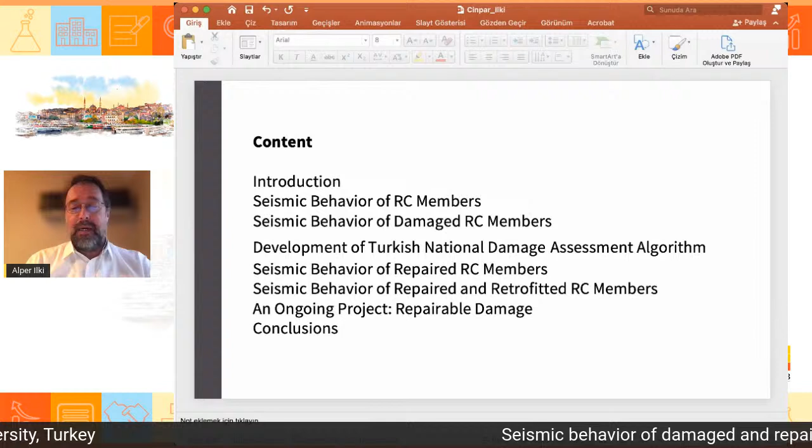Then we are going to talk a bit about the seismic behavior of repaired and retrofitted reinforced concrete members. And then I'm going to summarize an ongoing research project which targets to establish a new seismic design performance level, called repairable damage, which came into our terminology particularly after the earthquakes experienced following the Christchurch earthquakes in New Zealand. And then I will finish with conclusions.

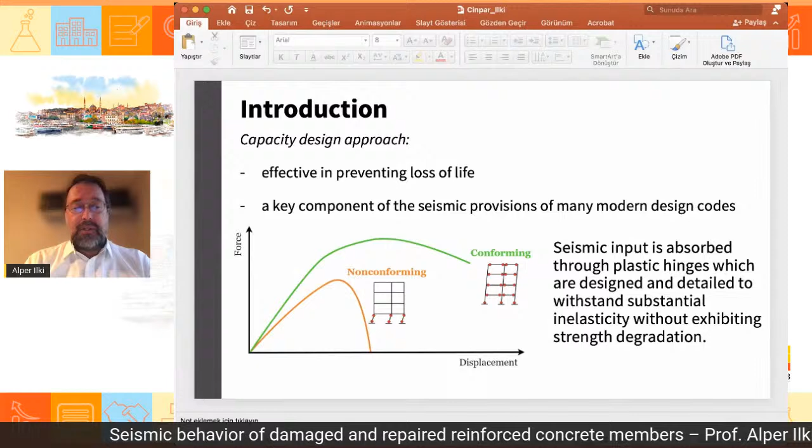So, as all of you know very well, capacity design approach is now being used all around the world in seismic design, which is, of course, very effective in preventing loss of life. That's very good. Because previous structures were not built considering the capacity design principles, such as strong column, weak beam, and the strength hierarchy in terms of flexure and shear, and so on, we had many casualties due to unpreferred failure mechanisms of the structures. But hopefully, after these capacity design principles have taken their place in the seismic design codes, hopefully these kinds of life losses will be less.

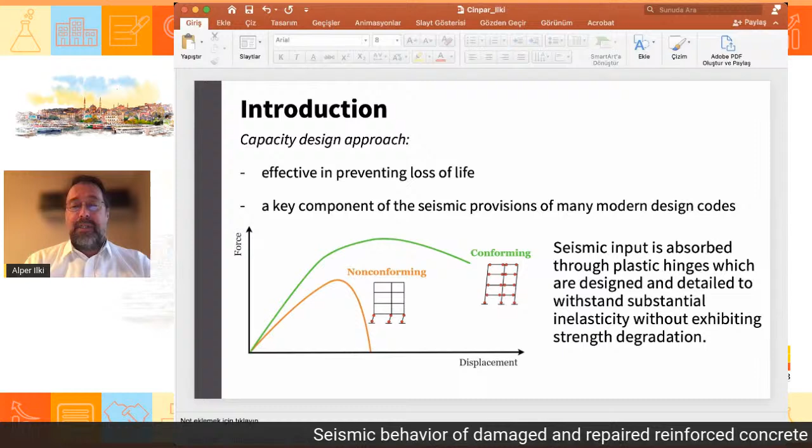So it's a key component now in all the modern seismic design codes, which basically adjusts the locations and types of inelastic deformations so that we can avoid total collapse of the structure, although the structure dissipates a lot of energy and experiences a lot of damage, while still standing against seismic actions without a substantial loss in strength.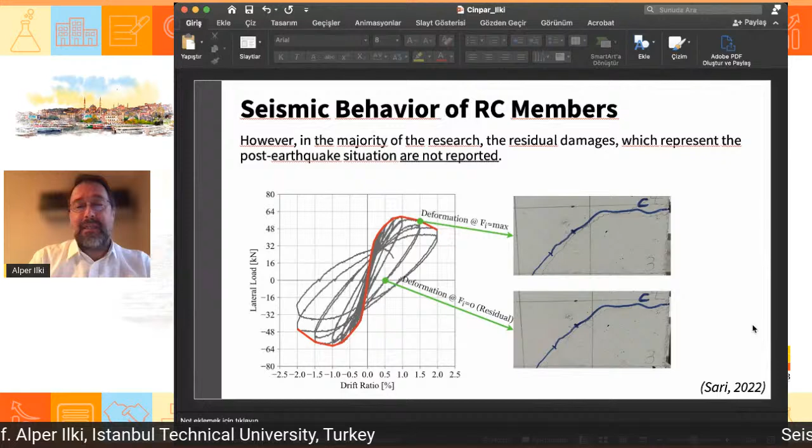We have to pay attention that although code-compliant reinforced concrete members may show gradual damage development, however, non-conforming members can fail very rapidly.

One example, I'll show a video that's very representative of many structures available in Turkey, particularly in Izmir in 2020, where many structures collapsed. Most of those buildings had columns similar to this one. Let me show you the video.

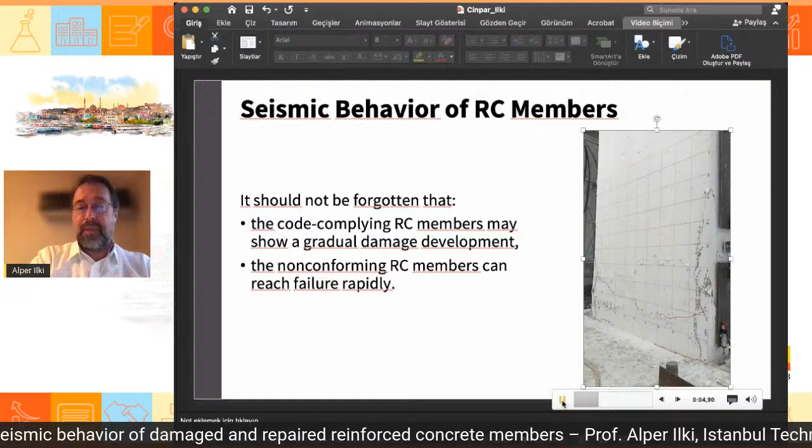I said the column will fail at a drift of 0.5%, much less than what you'd expect according to design rules. So the column is being pushed or pulled. We have a vertical load on the column, and that's how it fails - total destruction because of high axial load on it, very, very rapidly.

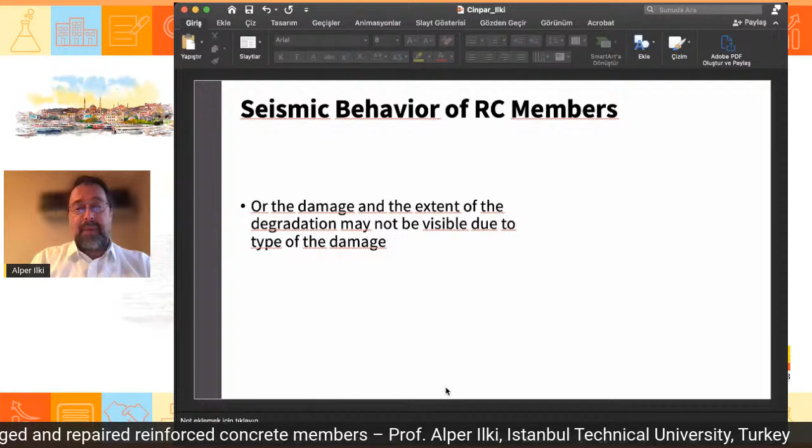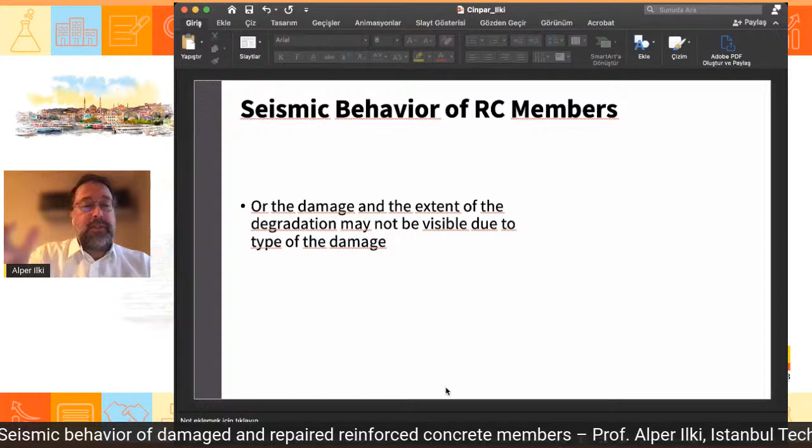Another problem is that the extent of degradation in strength may not be visible after the earthquake, due to damages we are not used to seeing. Code-compliant structures get damaged as we expect theoretically, but because of details like plain bars and insufficient anchorages, there are many different failure mechanisms.

I can show you a video on a project we conducted several years back on site, showing the building while it's being tested. I don't know if it works or not - possibly works, yeah, it's working.

The test went up to 4% drift, as you see on the graph on the right. At 4% drift, the strength reduction was about 40%. That's good for the structure because it's beyond our expectations - we wouldn't expect it to reach 4% drift and still stand, but it did. More interestingly, the damage was very slight; we didn't see much damage on the structure.

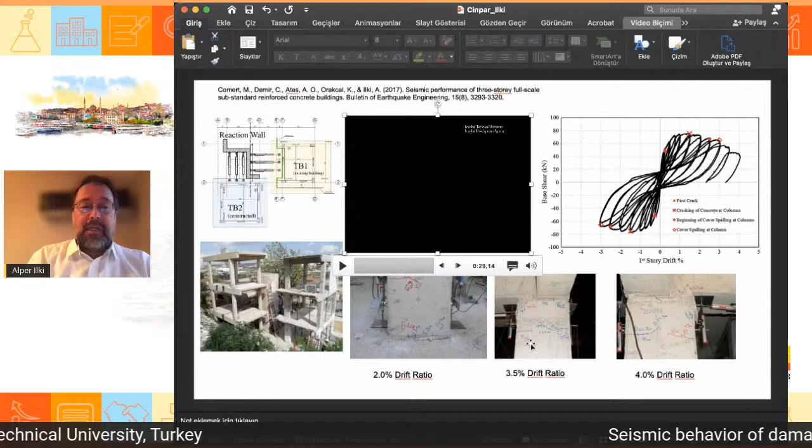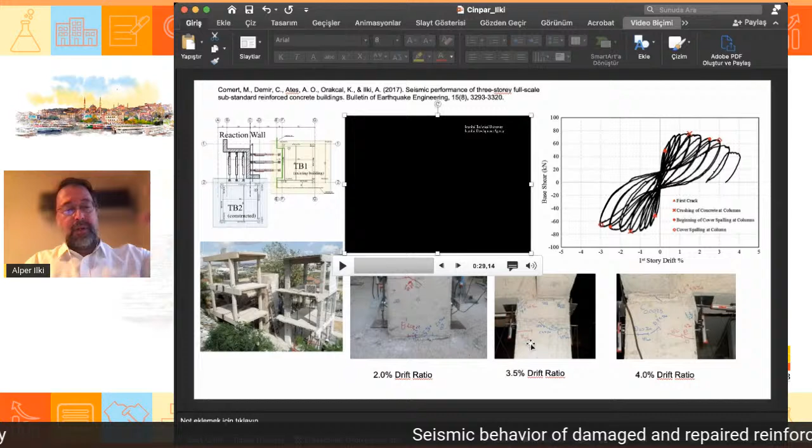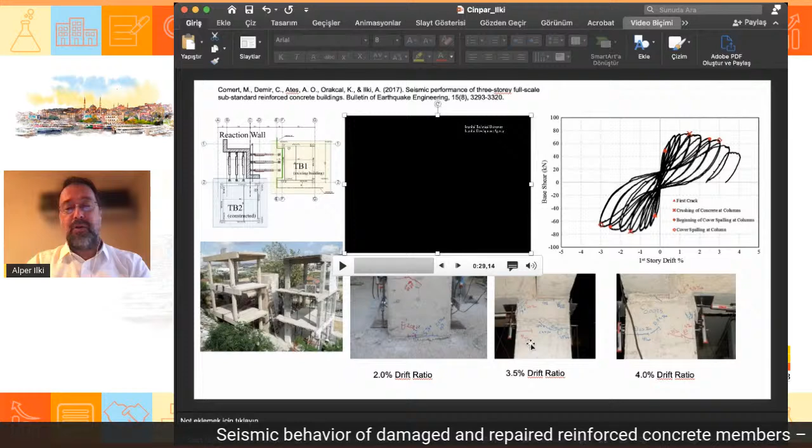When we analyzed this, we found the failure mechanism was totally different from what's considered in design - it was due to slip of longitudinal bars. The bars slipped, debonded from concrete along the lap length, and moved like tension ties from the footing to the end of the hook. So very little plastic deformation accumulated along this embedment length, which was much higher than the potential plastic hinge length on that column. Therefore, the unit deformations along the lap length were very limited, so the visible damage on site was much less than you'd expect from that kind of non-compliant structure subjected to 4% drift.

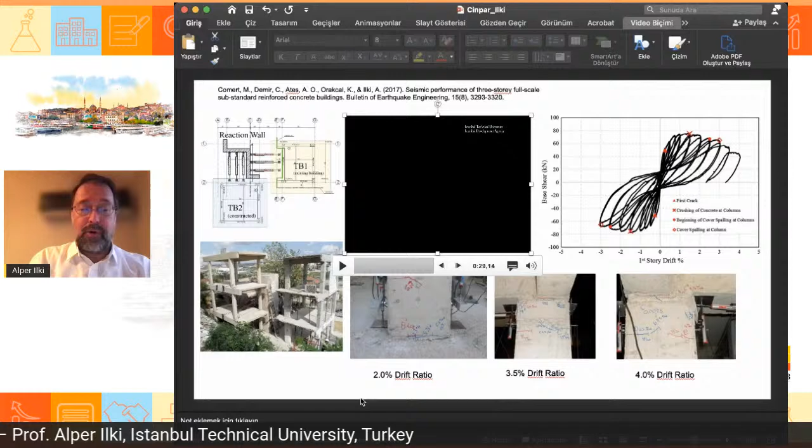This makes our work difficult. Another video - at that time I had to speak for 45 minutes, so to keep you awake I had to show some videos. That's one of them.

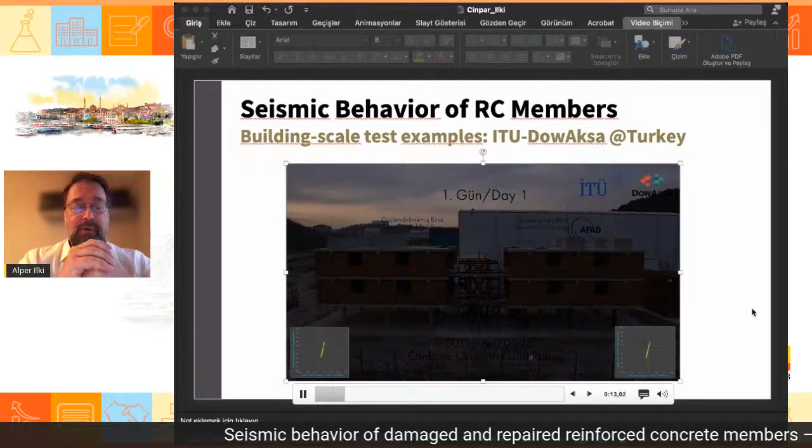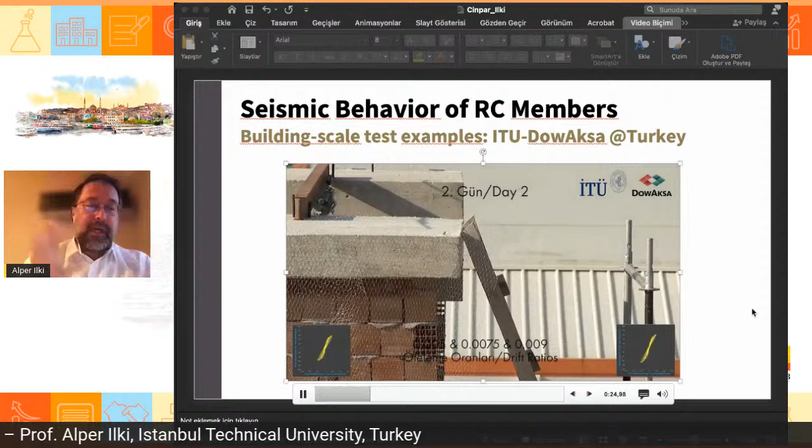We made tests on full-scale structures several years back. These are not specimens - they are full-scale buildings, identical buildings. The left one was tested as-is, and the right one was tested after retrofitting the first two-story columns with FRP confinement. I'll show you how the failure mechanisms change before and after retrofitting.

The left building collapsed at about 1% lateral drift ratio. In the coming seconds you'll see slow motion and close-up views of how the columns failed.

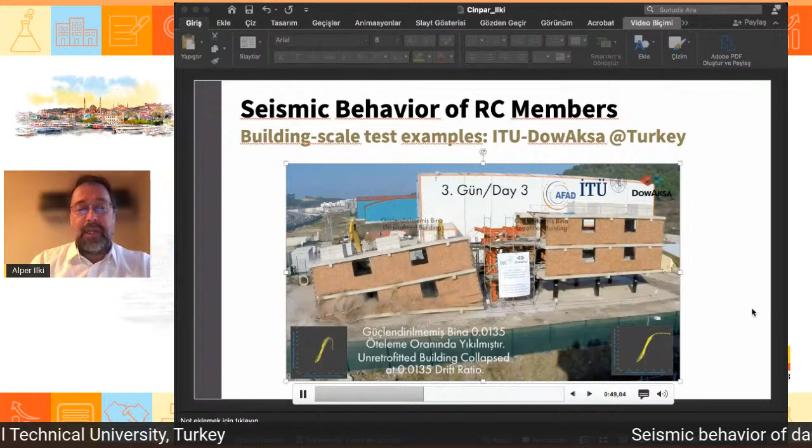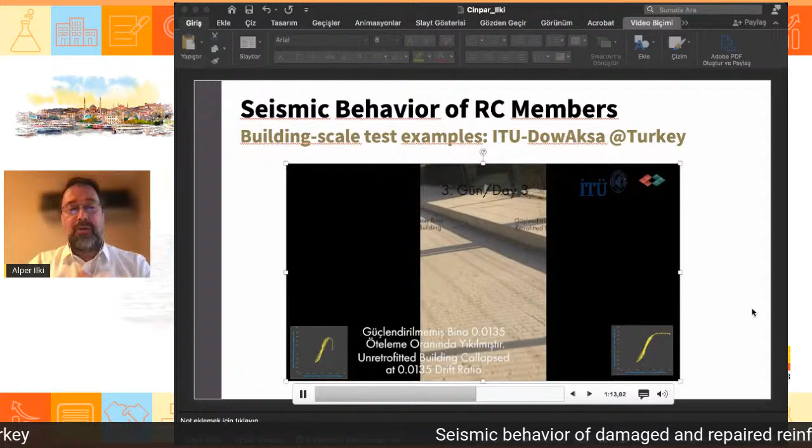Actually, these are not the worst type of structures available in Turkey - their concrete quality is higher than average, their transverse bars are like that, and the vertical loads on the columns are not as high as many buildings around. But still the displacement capacity was just 1%. Look at the column closer to us - when lateral forces increase with just a bit of displacement at about 1% at the first story level, the columns crush because of insufficient transverse reinforcement, and that's the mechanism.

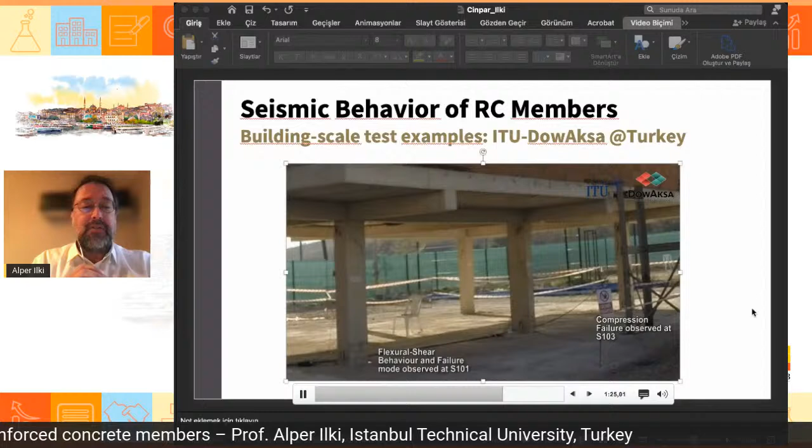Here on the left side column, to the front, you'll see a shear failure mechanism, again because of insufficient transverse reinforcing bars. You see a closer view here. If we had these transverse bars there, we would avoid this kind of failure.

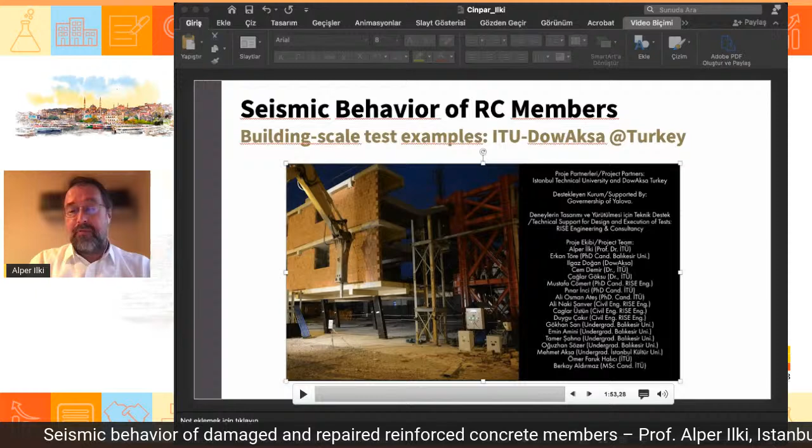Then what happened to the retrofitted building? While this building collapsed at 1%, the building survived until 15% - you're not hearing wrong, 15%, which makes 45 centimeters lateral displacement at the first story level. The excavator machines are just there for security measures; they're not touching the building because the systems are still standing. After 15% drift, this retrofitted structure hadn't collapsed, so we had to collapse it ourselves using these machines after the end of the test.

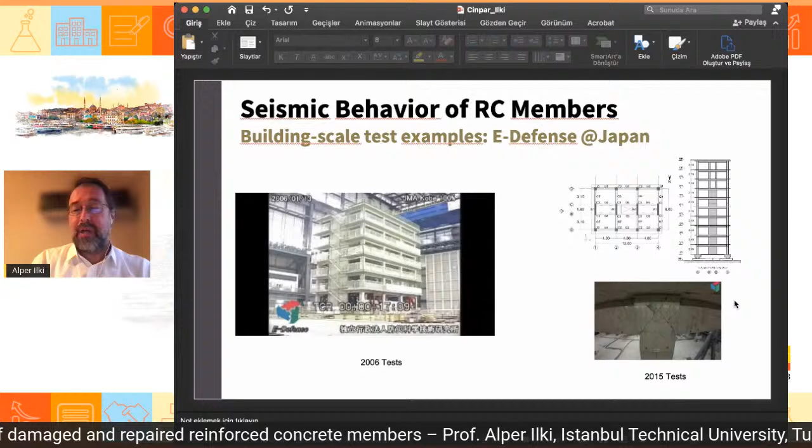There are other tests which I will not show for the sake of time. In E-Defense, we have some joint projects going on with them. And so in each test, based on the design philosophy of the structural system, we come up with different failure mechanisms, which would require different repair methodologies.

So how do we determine the seismic performance of earthquake-damaged RC buildings? That's important to determine what kind of measure we are going to take. Shall we repair or shall we retrofit, or what kind of repair are we going to conduct? And of course, this depends on the level of damage, either heavy damage or moderate damage on some members.

There are some documents, some guidelines for that, like FEMA 306, and the Japan Building Disaster Prevention Association guidelines for post-earthquake damage evaluation and rehabilitation.

As Turkish Catastrophe Pool, we have a post-earthquake damage assessment methodology. It was there since 2003 or something like that, but then it has been revised recently. And nowadays the Minister of Interior, AFAD, and the Minister of Environment and Construction discuss making this a kind of national damage assessment methodology, which would be good because nowadays different institutions conduct different damage assessments, and then different results can occur, and this is not very good for the people.

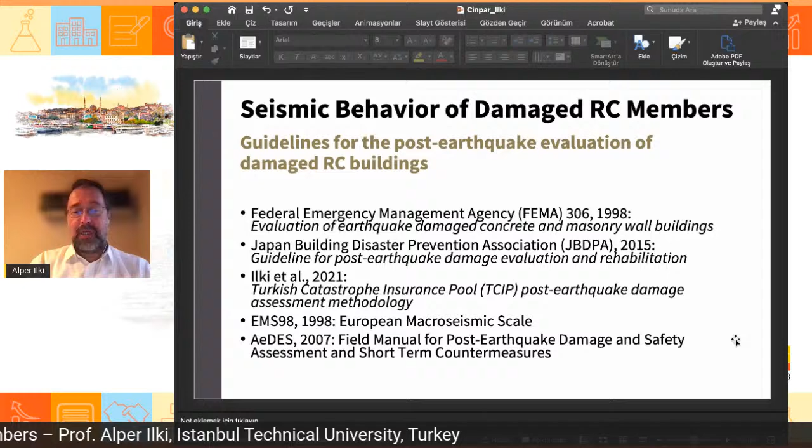If you look at FEMA 306, it gives quite detailed approaches to tell us how we can consider the effects of damage on our structures for modeling the building after damage. Basically, there are three parameters: one is the modeling of stiffness of the structural member, the second is about strength, and the last one, lambda D, is about the displacement capacity of the structure.

So it is very good that based on the level of damage, for example slight damage and moderate damage, the document gives us how to consider the reductions in displacement capacity, strength, as well as stiffness. And better than that, it gives us how we can model the structures after repairing with different techniques. That's quite a good approach to assess how damaged buildings and damaged members behave in the next earthquake, either before repairing or after repairing.

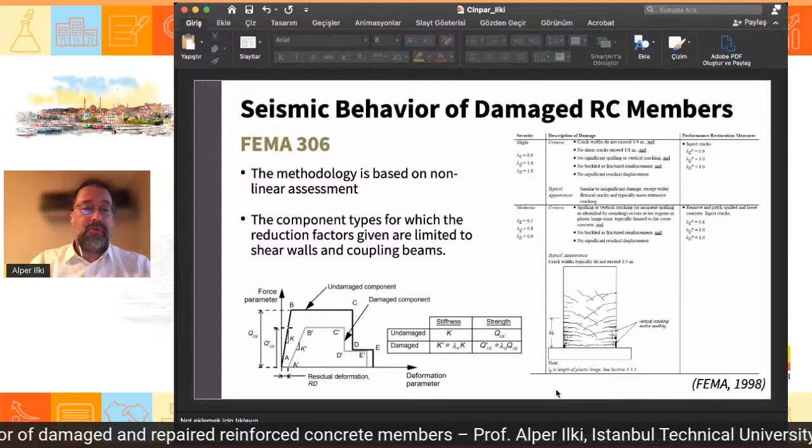And we have used that while we were developing the Turkish Catastrophe Pool damage assessment criteria.

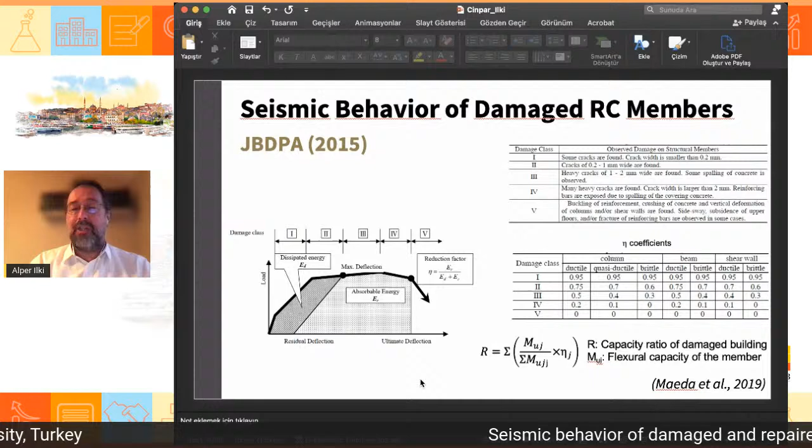Another similar one, not exactly the same, is the Japanese document, which is based on the lost energy dissipation capacity during the earthquake divided by the total energy dissipation capacity. So while the FEMA document considers stiffness, strength, and displacement capacity reductions with different coefficients, the Japanese use just a single coefficient, which goes from 0 to 0.95, considering the type of the member - shear wall, beam, and column - as well as the degree of the damage. So with those, you can estimate how much residual seismic performance you have in a general sense, in terms of remaining energy dissipation capacity.

The Turkish Catastrophe Insurance Pool disaster damage assessment methodology was lastly revised in 2020. There are two inspection procedures now I'm going to share with you, but actually there are three. The one I don't show here is for very critical crisis situations, where you have to be very, very quick to make the assessments.

Then we have a simpler algorithm, in case we need to be more quick. These two methodologies allow us that, and they are for relatively smaller structures and larger structures, I would say.

For smaller structures, like plan area less than 600 square meters and number of stories less than 10, all the damage of vertical and horizontal members are taken into account, because since 1998, capacity design principles are in place in Turkey. So we expect that buildings constructed in the last 20, 23, 24 years will fail due to damage of horizontal members rather than vertical members, so they are included as well.

The damage thresholds, definitions of different damage levels from 0 to D, from none to very heavy damage, are kind of calibrated from test results. Many tests have been considered in the literature, including our own tests, and these limits were set, which are quite in agreement with other damage assessment methodologies.

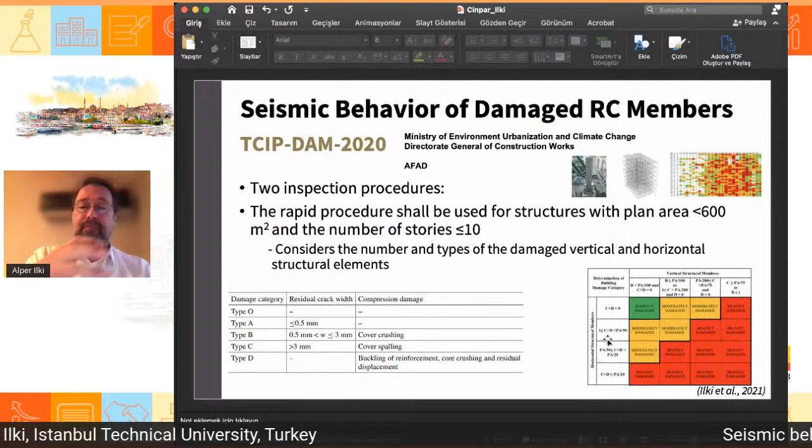In that case, it's enough for us to deal with the number of damaged members. So based on the number and degree of damage of vertical structural members and horizontal members, we decide whether the building is moderately, heavily, or slightly damaged.

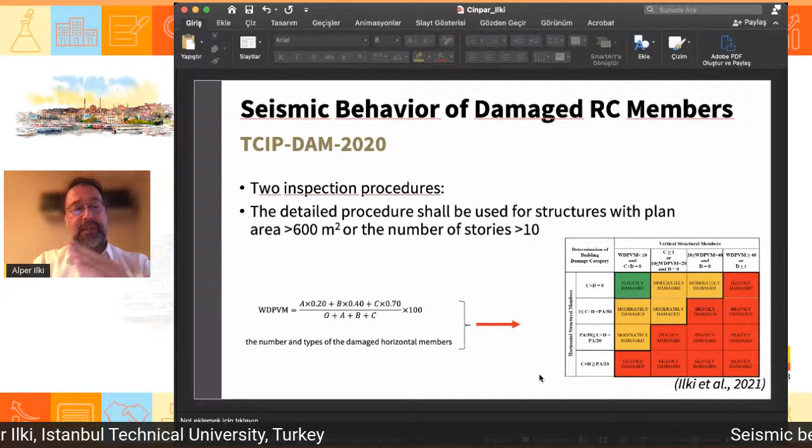Due to sake of time, I'm not going into details. The more detailed procedure, which we suggest for larger or higher structures, uses a weighted damage percentage of vertical members, and also the number and types of damage of horizontal members. That takes more time on site to apply, but the basic philosophy is the same: a very limited amount of loss in seismic capacity for slight damage, and financial considerations for deciding whether repair is feasible versus demolishing and new construction.

The European macroseismic scale is, as you know, more global in the information it gives. AeDES, the Italian approach, has some questions about the damages and the extent of those damages, and from that they can decide about the overall damage.

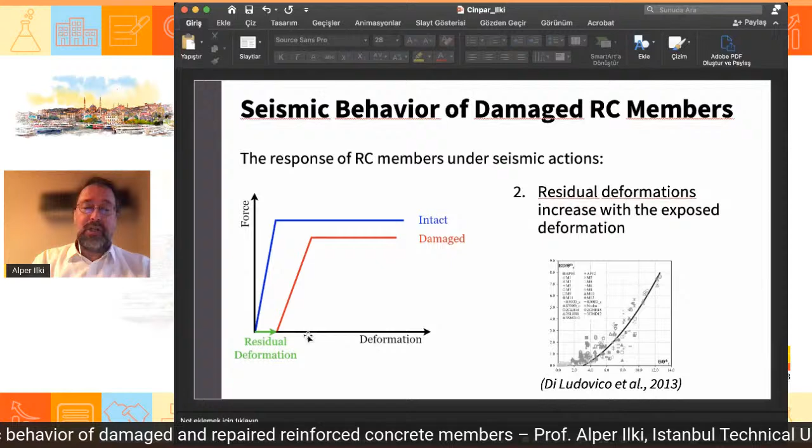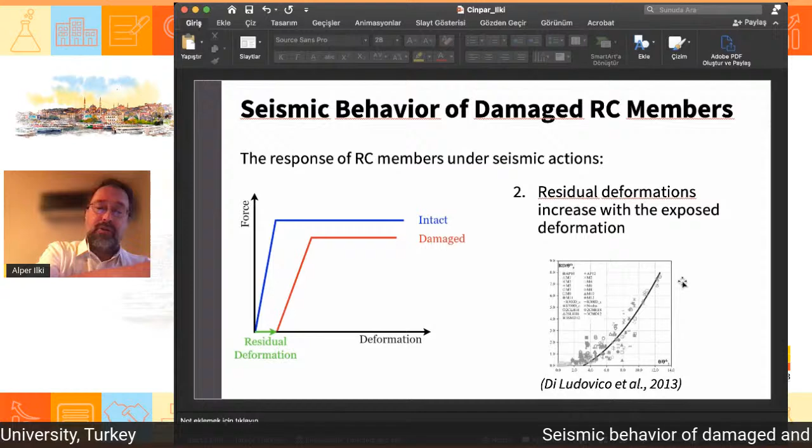Similar studies have been done for residual deformations, which will affect our displacement capacity during the next earthquake. Residual deformation also increases with the increase in the first earthquake's demand, as represented by this curve from Marco Di Ludovico and colleagues.

There are also empirical formulations and other suggestions for the reduction of strength and deformation capacity, but it depends on many things: structural characteristics, normal force, reinforcing bars, concrete, detailing of reinforcement, and also more difficult things like loading type and rate.

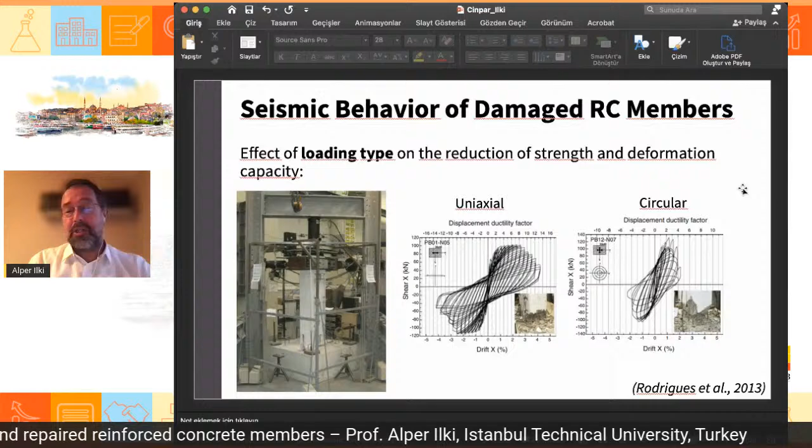For the very same column, typically we make uniaxial tests on site, which sometimes give good results, as you see on the left-hand side. But for the very same column, if you apply biaxial loading — for example, from this study by Portuguese colleagues — the behavior could be remarkably different, which is many times not properly taken into account.

The loading rate I mentioned could also affect the behavior to a certain extent. Here's an example from Marder and others: if you do a static cyclic test, versus the same loading pattern applied dynamically, the displacement capacity, strength degradation characteristics, and pinching characteristics all change, as you see here.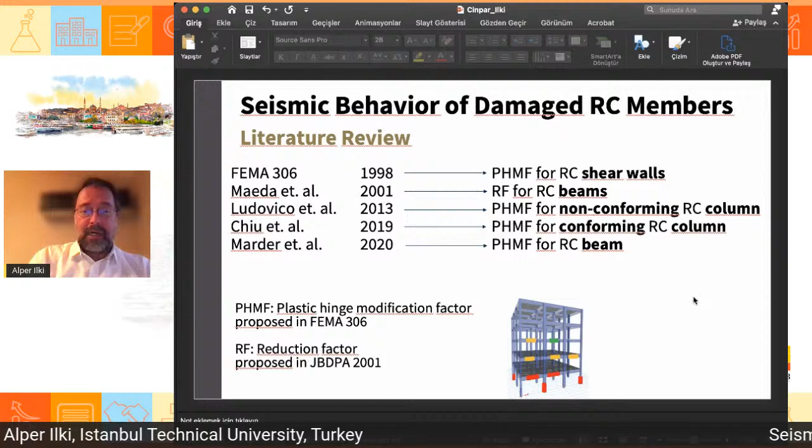I already mentioned FEMA, which gives plastic hinge modification factors, but mainly for shear walls and coupling beams. Maeda and others have given seismic reduction factors for reinforced concrete beams as a function of damage level. Ludovico et al. have given plastic hinge modification factors for non-conforming RC columns, Chiu and others for conforming RC columns, and Marder et al. for RC beams. There are others too — these are just some examples, but there isn't too much work.

There's not an exact consensus on the behavior of damaged reinforced concrete members, and the same is valid for repair, because the literature is very, very limited on these aspects.

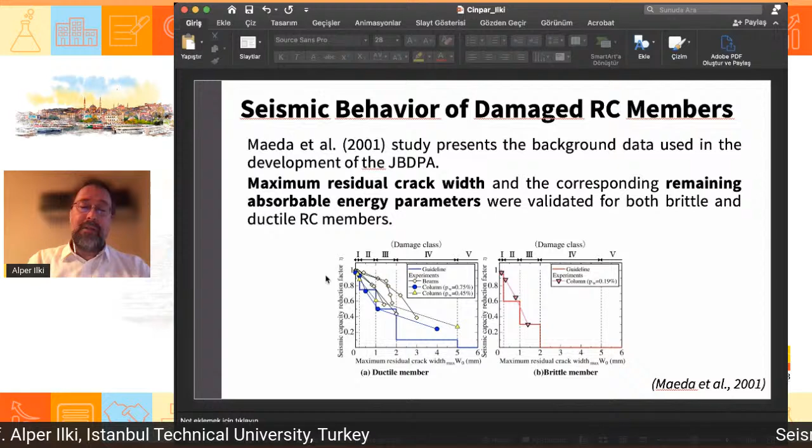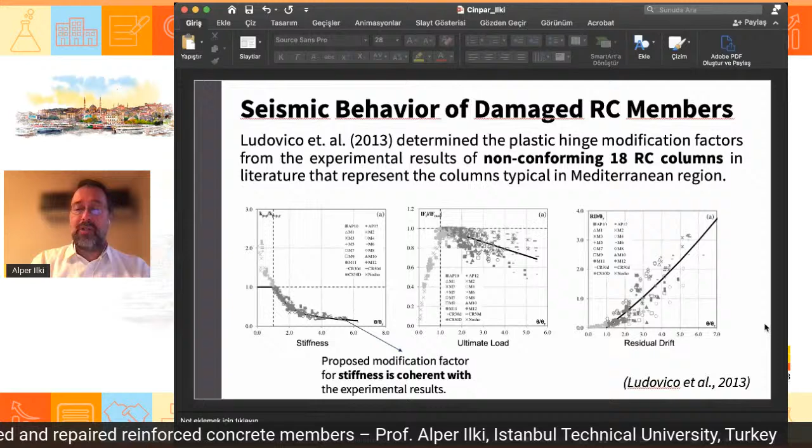Due to the sake of time, I won't spend much time on these. Maeda and others have given the relationship for ductile and brittle members based on the concrete crack width, which is the residual crack width observed after an earthquake or test, as a function of damage class. They have provided seismic capacity reduction factors in terms of energy dissipation capacity, so based on the dissipation capacity reduction, you can decide whether a structure should be demolished or repaired. Ludovico tested 18 non-conforming columns and gave curves accounting for the change in stiffness as a function of rotation ductility, ultimate load, and residual drifts, which help model these members after damage for the next earthquake.

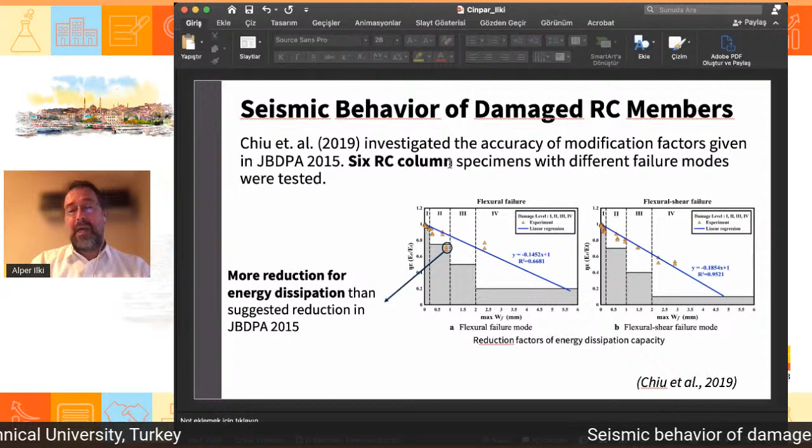Similarly, Chiu and others tried to check the accuracy of the modification factors given in Japanese guidelines. They tested 6 columns with different failure modes, flexural or flexural-shear, and showed that energy dissipation can be lower than predicted by the Japanese guidelines. This means that for certain characteristics of structural members, the guidelines may sometimes be unconservative.

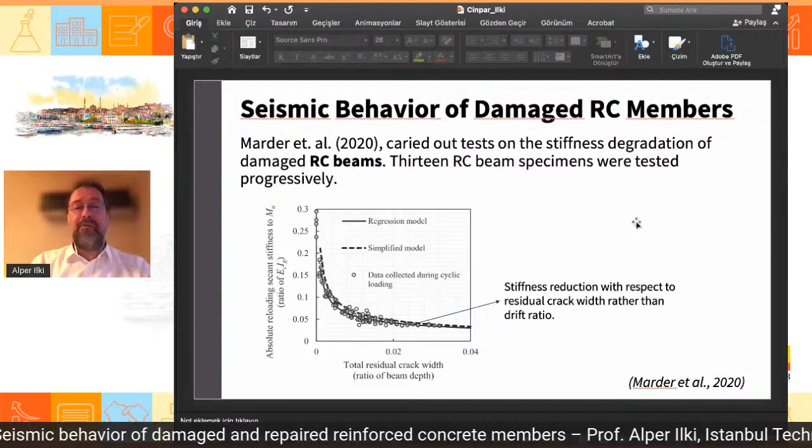Also, Marder and his colleagues proposed a curve for the reduction in stiffness as a function of crack width on beams. This was done for the support sections of the beams, which are active during seismic actions.

Now we move to the development of the Turkish national damage assessment algorithm, which is somewhat similar to the Japanese approach, considering the lost energy dissipation capacity with respect to the total energy dissipation capacity. The damage modifiers for slight, moderate, heavy, and very heavy damage were initially similar to the Japanese guidelines, but these coefficients were recently changed based on a deeper literature survey.

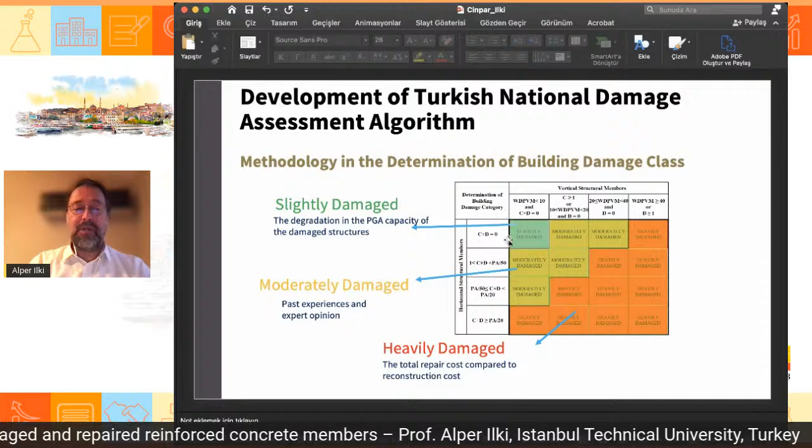This means a member with damage level A, slight damage, has lost 20% of its capacity; for moderate damage, 40%; for heavy, 70%; and for very heavy, total capacity is lost. That's the assumption. Based on the weighted average of damage of vertical structural members, the methodology allows you to determine the damage level of the structure. Nowadays, Turkish catastrophe pool engineers use this approach automatically using tablets during damage assessment procedures, with the target of making it a more generally accepted methodology.

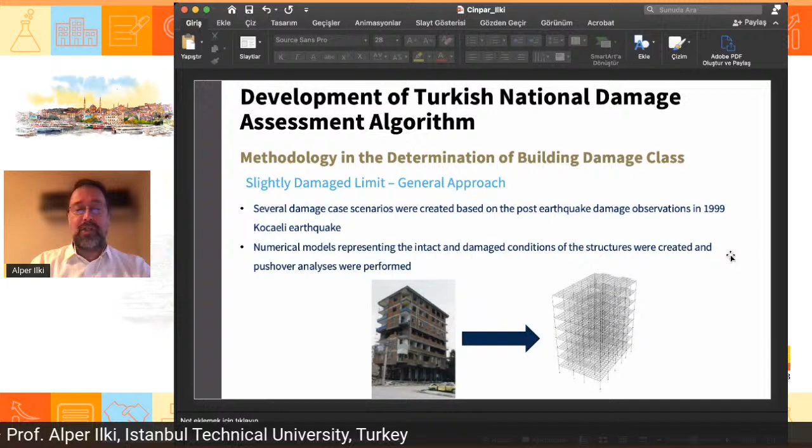Let's see how the slightly damaged limit is determined, as I mentioned before. We took into account several realistic damage scenarios based on post-earthquake damage observations after the 1999 Kocaeli earthquake. Numerical models were prepared for intact and damaged conditions of these structures, and pushover analyses were conducted for over 200 cases.

We then determined what kind of damage distribution caused a 10% degradation in PGA capacity of those structures. We also considered a confidence level of 99%, so we didn't work with mean values, but with mean values minus 2.5 standard deviations to be on the safe side.

For members with type B, moderate damage, the number of moderately damaged members divided by plan area should be less than 0.01. If this is fulfilled, the structure is slightly damaged based on rapid inspection.

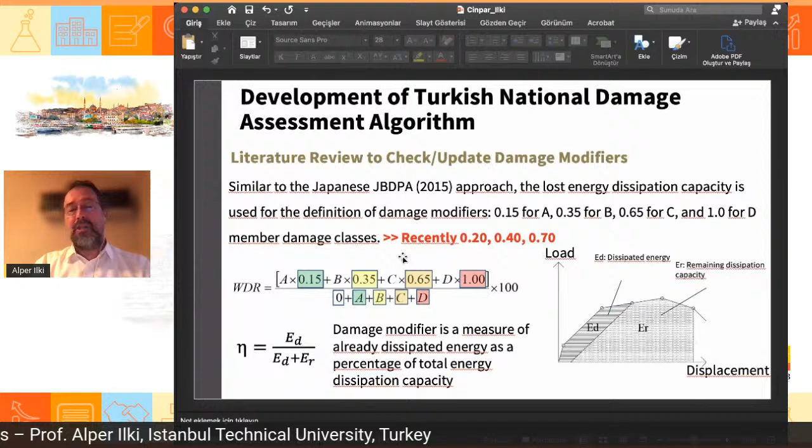For detailed inspection, we did similar things, but instead of the number of damaged members, we work with a weighted damage percentage for vertical members, calculated using this equation. Here, A, B, C, and D represent the total cross-sectional area of members with damage level A (slight), B, C, and D respectively. This gives a weighted average considering the damage of each member and their cross-sectional areas.

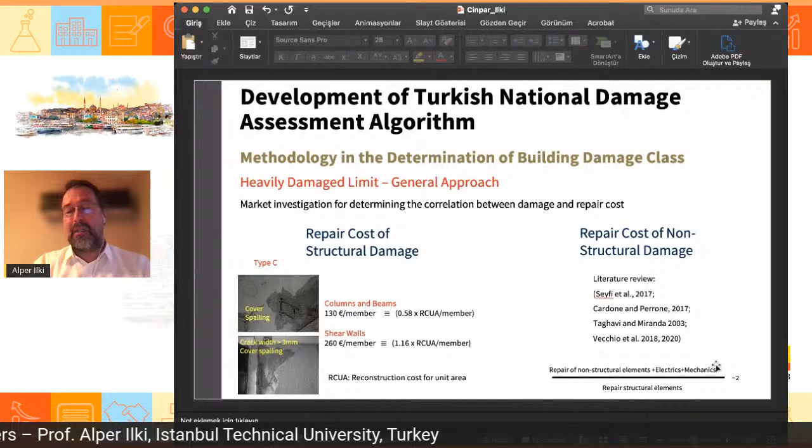So for the heavy damage limit, as I mentioned, we considered the cost of repairs for structural and non-structural damages. For non-structural damages we didn't have much information, or rather we have a lot of damage data in the Turkish catastrophe insurance pool, thousands of cases, but it depends on market conditions. So to be more scientific, we used a relationship assuming that repair of non-structural elements, plus mechanical, electrical and architectural details, costs about double the repair cost of structural elements after an earthquake. With these assumptions, we also got market prices for column, beam, and shear wall repairs.

We also had to make an assumption about the distribution of damage from the ground story to the top. Of course that's a very rough estimation, but you have to do something. This changes remarkably from structure to structure, based on a literature study involving colleagues from Portugal, and on earthquakes like Elazığ and Kocaeli. We assumed that if the ground story damage is 1, the next story is 0.75, the next 0.5, the next 0.25, and damage above that is negligible.

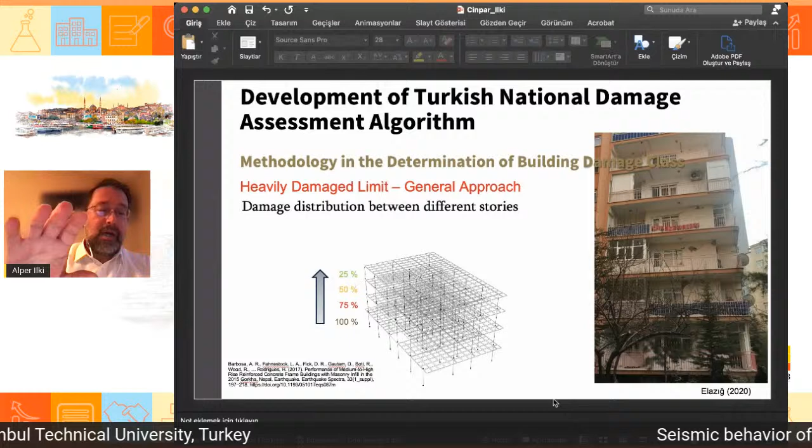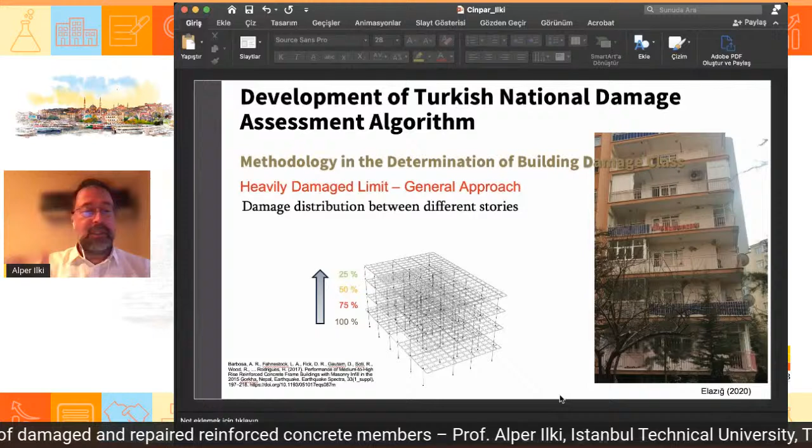Of course that's not always correct, we know that clearly, but it's the assumption we made, because in damage assessments only the most heavily damaged story is taken into account. Therefore we don't have data for the other stories. Even the data for the ground story is not very reliable or objective—you can get significantly different decisions depending on the person making the assessment, where it's made, and the political situation at the time. So it's rather approximate; we should accept that.

For determination of this heavy damage limit, we studied more than 80,000 damage scenarios, and cost analyses were performed for different damages, keeping in mind our limit: if the total repair cost—structural and non-structural—divided by the reconstruction cost (demolition plus reconstruction) is larger than 40%, don't repair it, demolish it instead. This is important for the insurance sector to decide whether to pay the full amount or just the repair cost.

Based on this, for rapid inspection and detailed inspection we determined what the damage level should be. This time we're looking for type C damage—heavy damage of members—rather than moderate damage, because we're talking about demolishing the structure. If the number of type C heavily damaged members divided by plan area is larger than 0.015, then the repair cost exceeds 40% of demolition and reconstruction cost. That's the limit: below it you can repair, above it you should demolish.

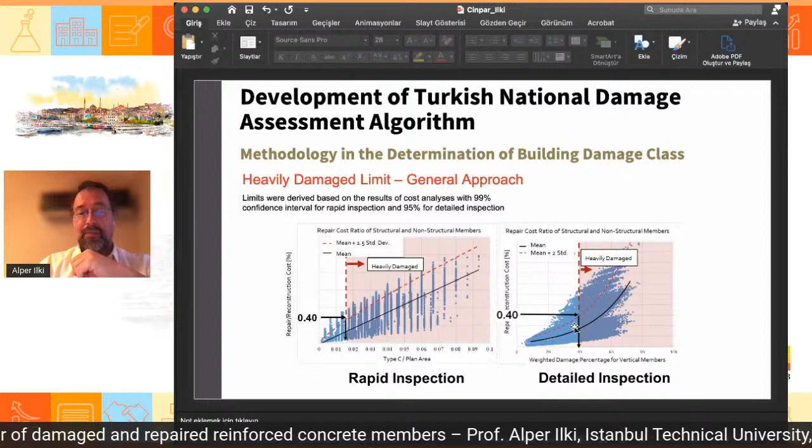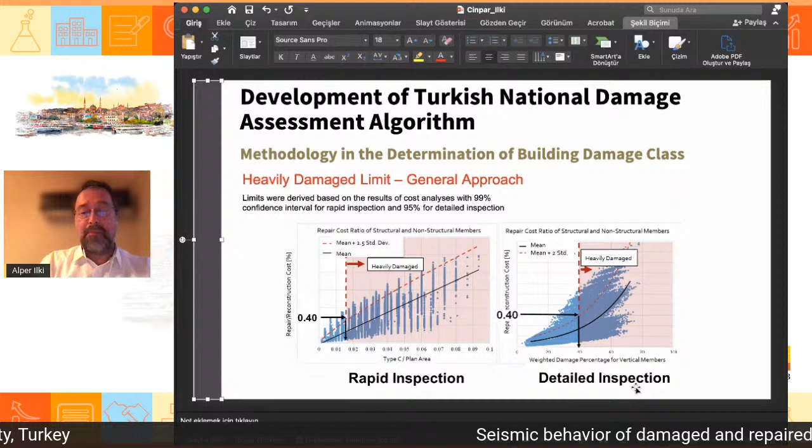The same thing has been done for detailed inspection. Due to the sake of time, I'm going to pass this slide without details. If there are questions, I'll try to answer anytime, not during this presentation—you can write me an email and I'll try to answer afterwards.

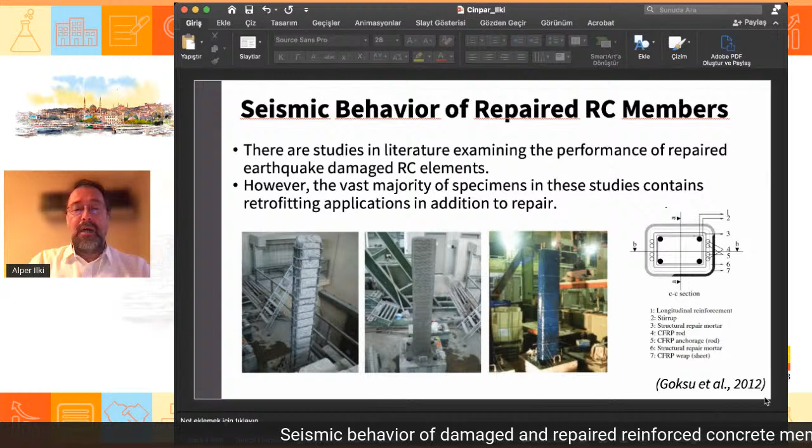So now we looked at the seismic behavior of damaged structures, and let's see how the structure behaves after repair. There are many works—cyclic tests, theoretical works, shake table tests—but they're generally singular and don't cover everything. Some of them are shown here; again due to time I'm passing those. Generally we get good results after repair: either the strength is recovered, or sometimes it's better if the repair includes some retrofitting as well.

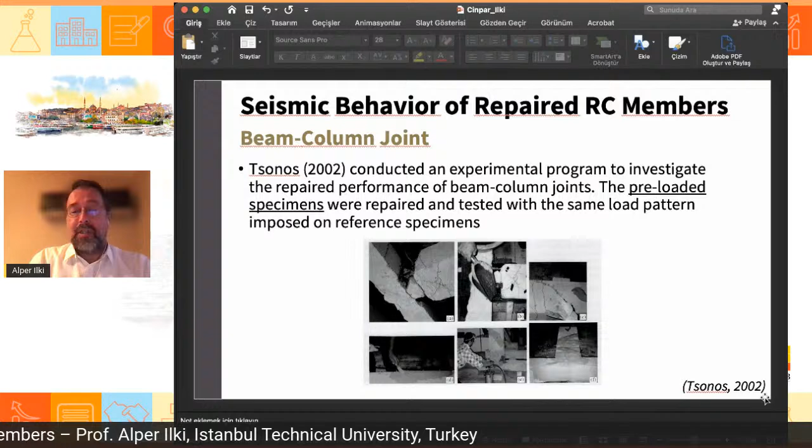These studies were done on columns and beam-column joints. As you see tabulated here, based on the initial damage and the repair methodology, you can get different results—you may recover the strength or not, sometimes recover deformation capacity, sometimes not, and so on. This is valid for beam-column joints and for other members as well.

Here, for example, you see how damage to a beam at the support affects its stiffness and deformation capacity, and how repair contributes to the behavior quite successfully, bringing it back to its original state, recovering strength and deformation characteristics. Marder and others have proposed relationships, as I showed in a curve before, for determination of the second stiffness, basically for beams at support regions without axial load.

So these points show those experimental works, and the dashed line is their limit. It's successful in terms of beams, but they have checked only one column specimen. As you see here, this advice is not valid for that single column specimen they checked in their paper. Interestingly, the horizontal axis here is drift ratio.

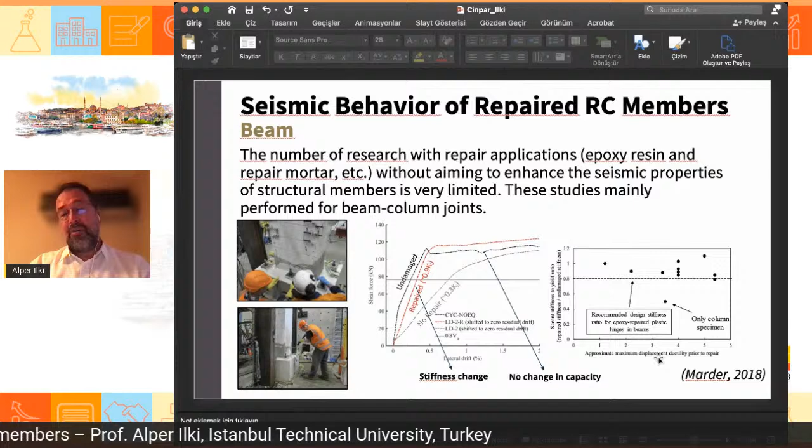Sorry, displacement ductility. You see that the column has been subject to a displacement ductility of 4, which is quite excessive for a column. Based on the level of axial force and other details, this can be possible, of course, but this changes much if the level of axial load on the column is different.

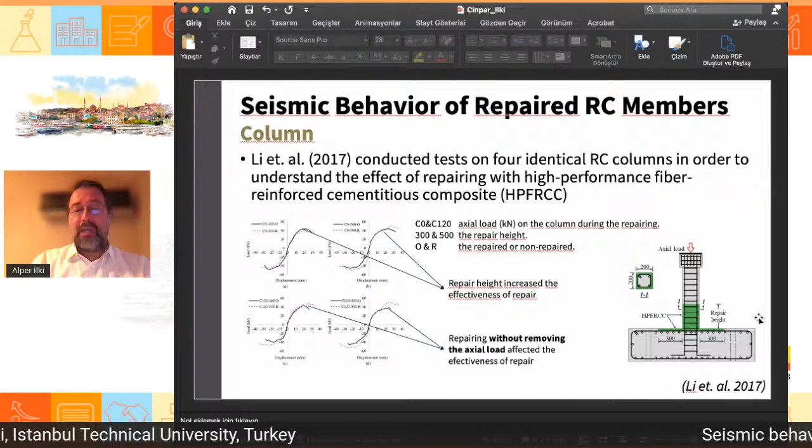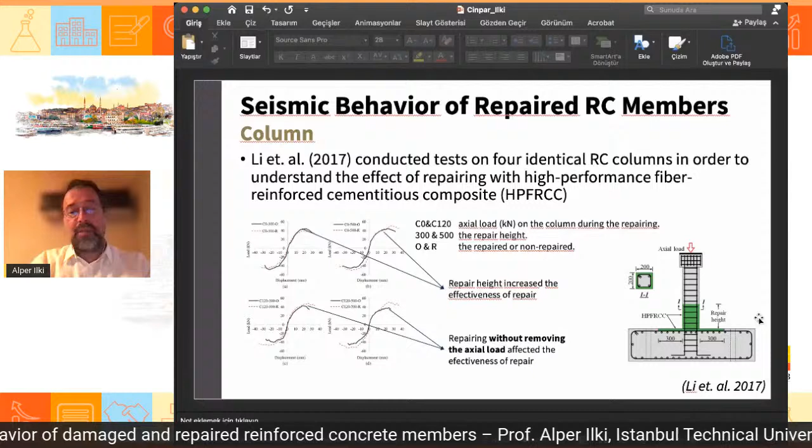So for beams, there are also scattering results. For columns, there are some studies, but the effect of repair changes as a function of the axial load on the column—whether the axial load is still there during the repair, or whether you somehow support the system or not, and how long, and which part of the column you are repairing. You can come up with different results.

There are many tests like that, not just this one. Most repairs, particularly those used with repair mortar and then some kind of jacketing, either with FRPs or other kinds of materials, show a significant increase in ductility, and generally the strength and stiffness are also recovered.

There's again a study from Portuguese colleagues on repairing members with columns using some welding of reinforcing bars. As you see here, not only was the original behavior recovered, but slightly better performance was achieved. That's often the case, as I said, in the literature.

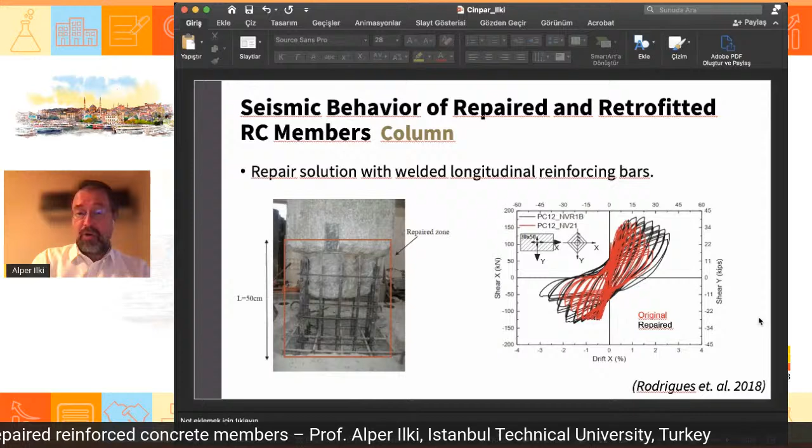So just a few words about our ongoing project, which targets determining what the repairable damage level is and how we can determine it. Basically, we are looking for a new seismic performance level, which will be better for future earthquakes with respect to targeting life safety.

Of course, this should be somewhere in between immediate occupancy and life safety, because immediate occupancy would not be economically feasible—probably the structure would be too strong and too costly. And if you go to the life safety performance level, yes, that's economical, but then the repair issues, accommodation issues, and financial issues would not be very good after the earthquake.

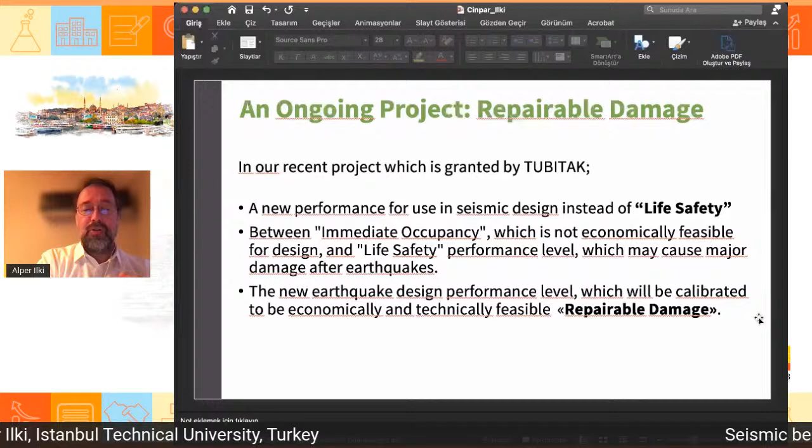So in between these two, there should be a repairable damage target level we can find, which is both economical and technically feasible. But the difficult question is how—what is it, and how will it be determined?

It's very difficult. To pass to conclusions in 2 or 3 slides: we have some data, very good data, for the residual behavior of damaged reinforced concrete members, but they are not enough to come up with general solutions.

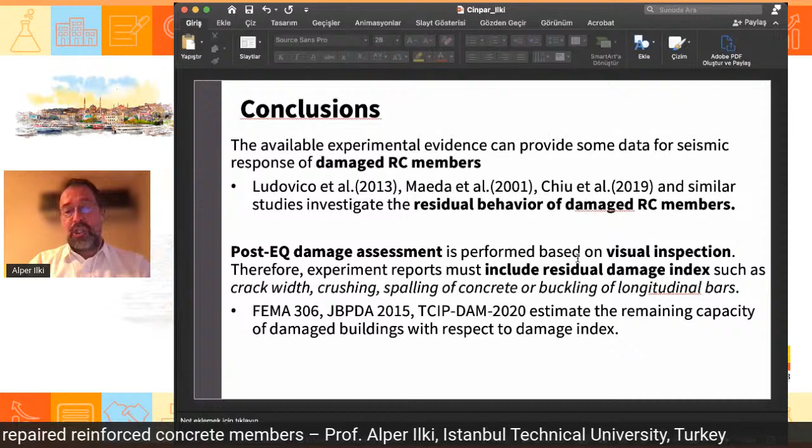We have some post-earthquake damage assessment methodologies, which we have to accept are quite approximate—they give some idea, but are not enough to propose new performance tables.

Therefore, the extent of damage for repairability needs to be investigated—which damage, which type of damage, which extent of damage is repairable. This is very important to set a new seismic performance level.

A new one, which will of course bring a more limited use of ductility capacity—which we like very much, which we have been designing for many years.

And of course, for answering the same question, we have to know which repair technique contributes how to our damaged structure. Therefore, we need to work on different repair techniques as well.

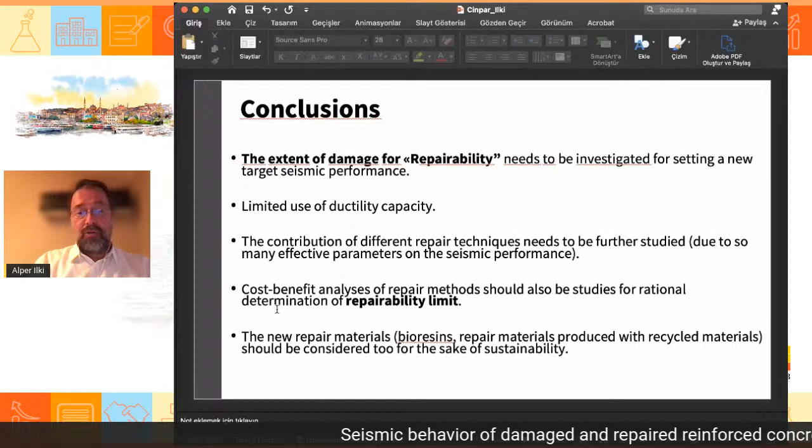And that's not only in terms of technical issues, but it's also important to know the cost of this repair. If it is too costly, it's meaningless to use it. So we have to also conduct some cost-benefit analysis to check which repair solution is feasible or rational to use.

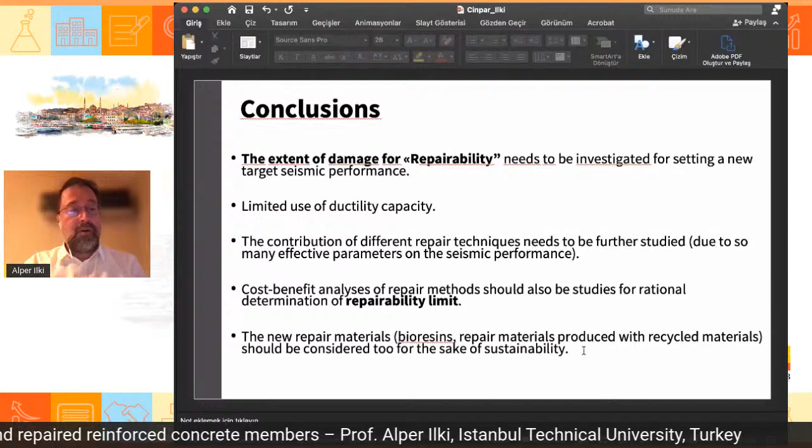Another thing is sustainability, which is a very critical issue today. There are always new materials coming up, and they should—some low carbon materials, bioresins, and materials that make use of recycled materials. There's some work on that, not too much, not common, not in the market yet, but research is going on. So we have to check their performance as well.

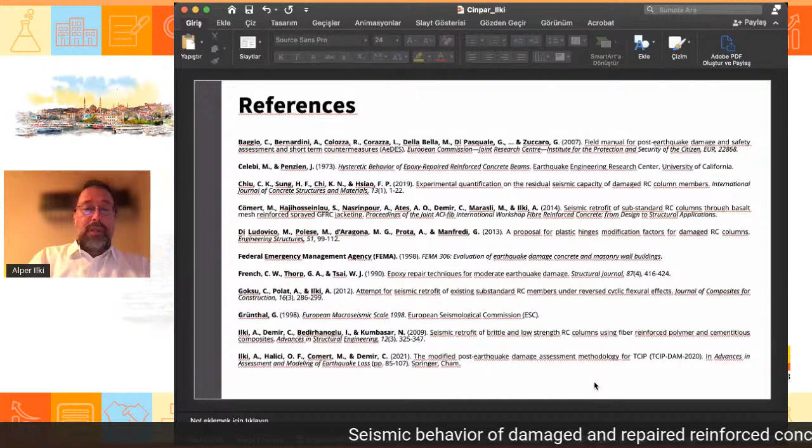So with that, I finish. You can see some references here on the presentation. And of course, there are acknowledgements to different institutions, as well as many individuals who have contributed to the tests and the studies I have shown here. With that, I thank you.

I think I just talked 44 minutes. That's good enough, and I have 1 minute for question and answer at least. Thank you.

Thank you, Professor, for your fantastic presentation, for sharing your knowledge with us. We have a question here. The question is about how cities could take advantage of the methodology for risk mitigation and the data on seismic or other natural hazards you presented today, especially in the case of the Brazilian situation. Could you tell us your point of view about the main issue that should be overcome today for us to have less impact on our buildings under natural hazards?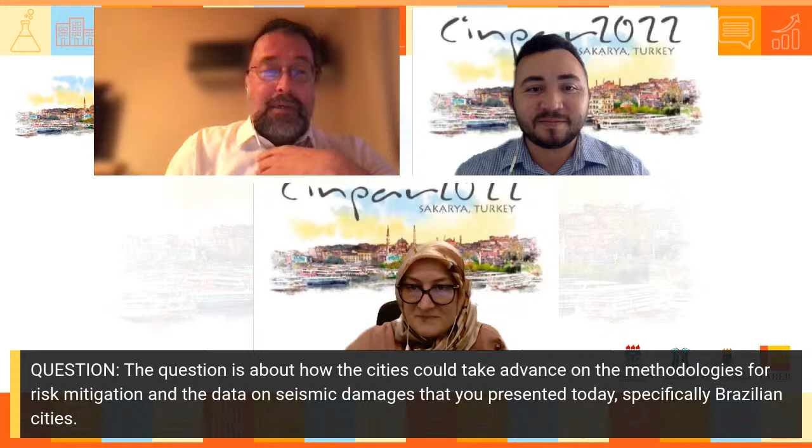Yeah, of course, very good question and very difficult question at the same time. I may not be the correct person to ask specifically about Brazilian cities. Maybe Professor, you can answer it better because you know the situation in Brazil. But I think we have people from Turkey as well. In case of Turkey, unfortunately, assessment studies show that a very big portion of existing structures built before the year 2000 have unbelievable insufficiency. They are very poor and subject to collapse during the next earthquake.

So in Turkey, and some countries around us like Cyprus, we have to quickly make assessments, which is also expensive. So we should find rapid and cost-efficient ways to get data on these buildings, analyze them, prioritize them, and then take action through the most convenient intervention methodology for the ones which really need retrofitting. Because in Turkey, if you consider all the buildings that don't fulfill the code requirements, the problem is so huge you can't do anything. So correct prioritization is very, very critical. I guess this may be valid for Brasilia as well, but frankly, I don't know the situation of Brazilian buildings.